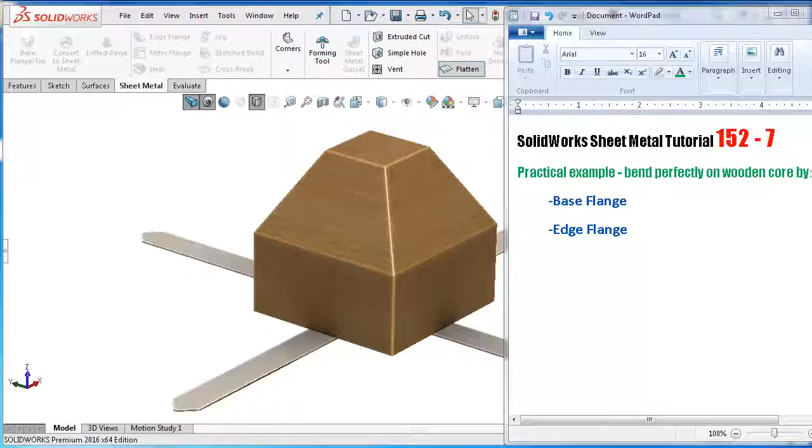This tutorial will be a practical example which we learned before together. We will review the base flange and the edge flange. We will bend this sheet steel perfectly on this wooden core.

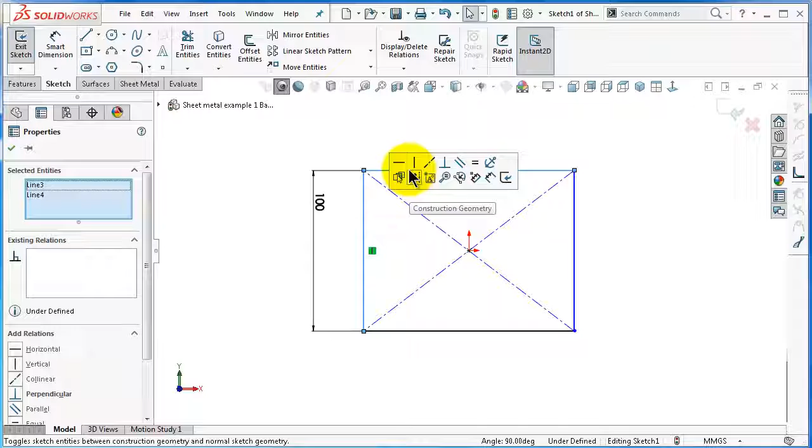Start a new part file, and then start a sketch on the front plane. Let's start making the wooden cube. Select center point rectangle, give it some dimension. Extrude it to 50 millimeter.

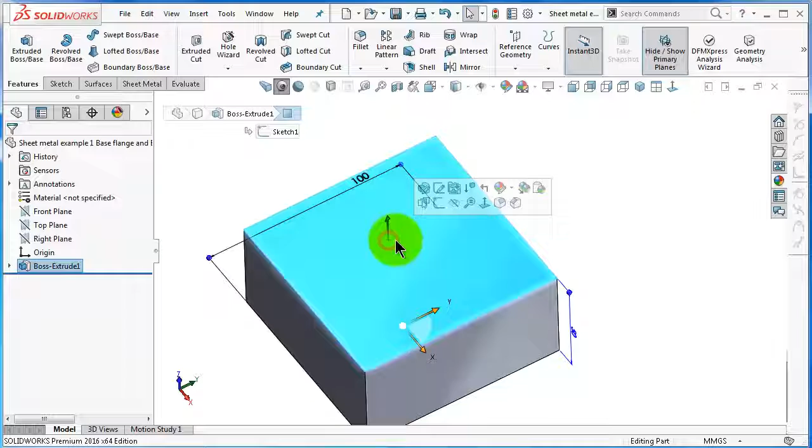And then extrude the surface, the top surface, another 50 millimeter. Select, start sketch, convert entity, extrude 50 with an angle of 30 degrees. Click OK.

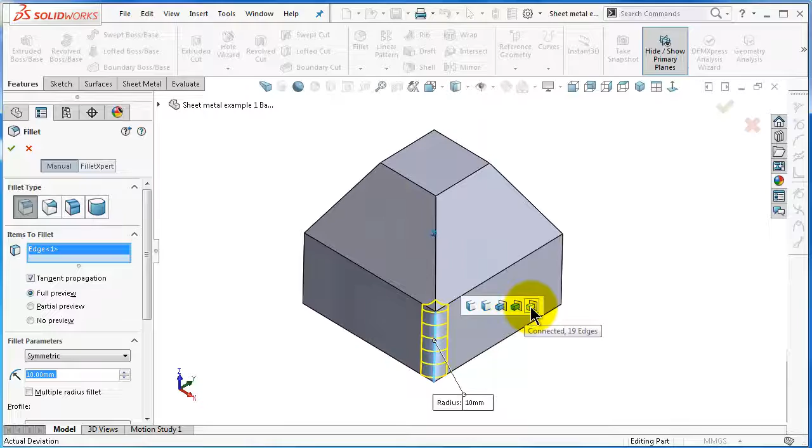Let's add some fillet. Select one edge and then select the whole edges over here with a radius of 10 millimeter. So this is the wooden core. I'll just change the appearance.

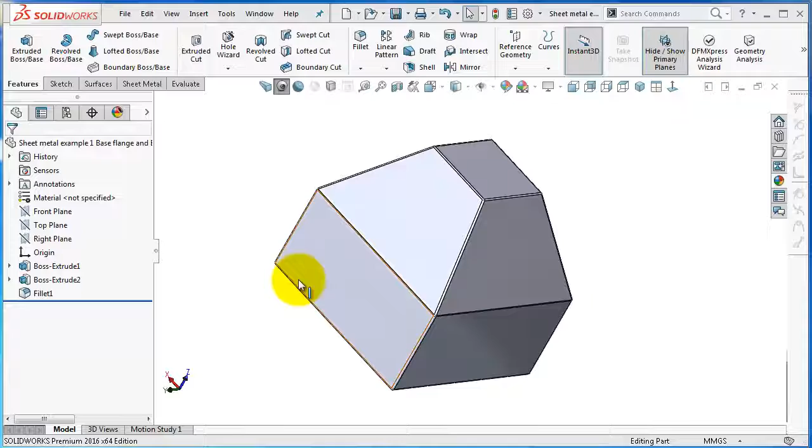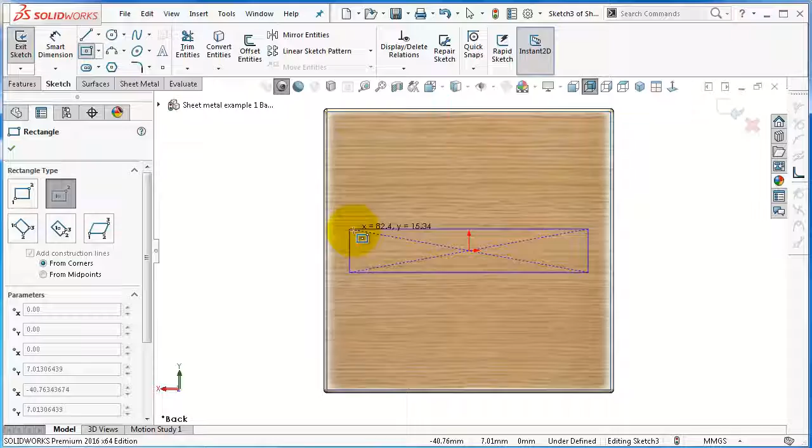Now let's make a base flange on the bottom of this block. Click sketch, normal to, center rectangle. Make sure to pick the inside edge. Make it for construction. Okay, make another one.

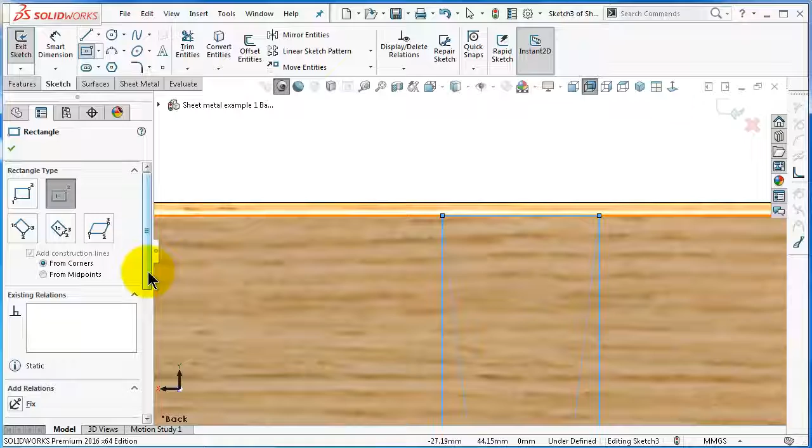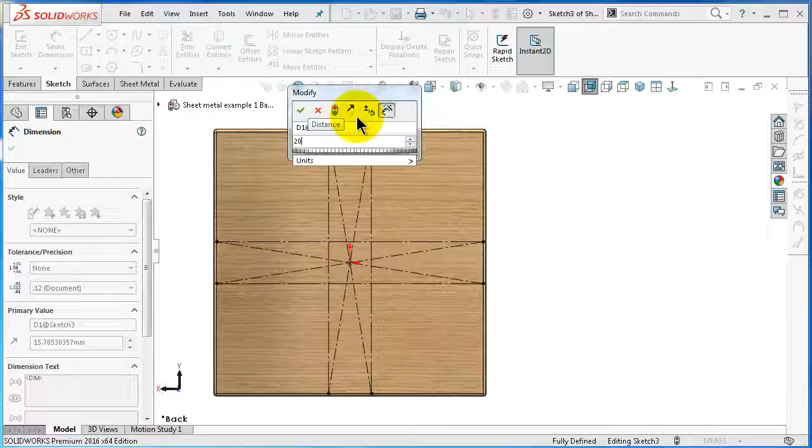Vertically, inside edge for construction. Add equal relation to the edges. Assign some dimension. Give this one 20, and then you will have the construction fully defined. Pick line and select the corners of these rectangles.

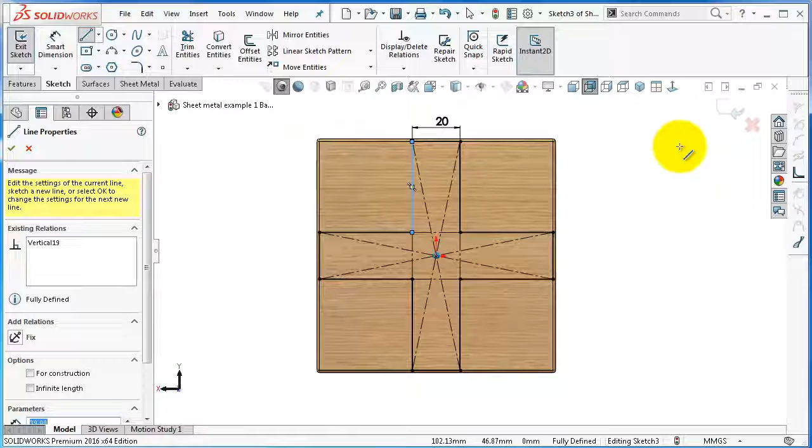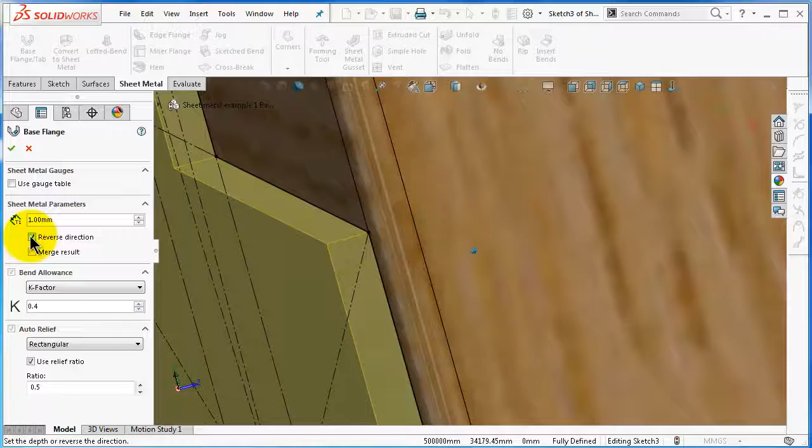This is the shape of the base sheet or base flange. Go to the sheet metal, base flange, and you'll have the sheet. Make the thickness to be 1 millimeter, reverse direction, and without checking the merge result, because this will be a sheet, the K factor will be 0.4.

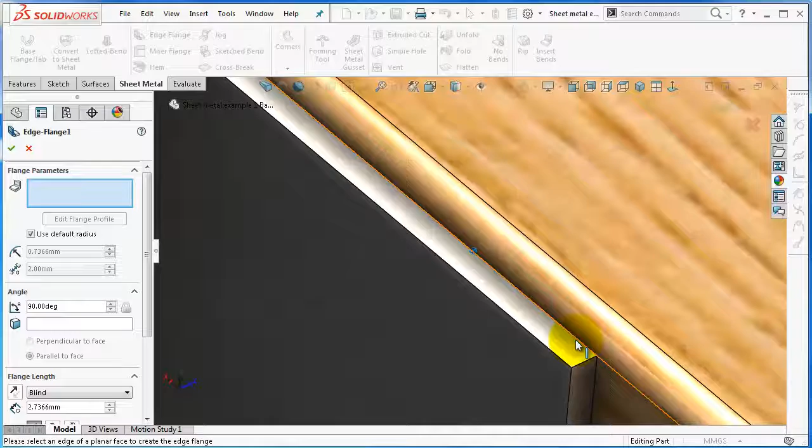And now let's see how to make edge flange that are perfectly bended on this wooden core. Go to the edge flange, select the edge, this edge, select second side, third side, and fourth side.

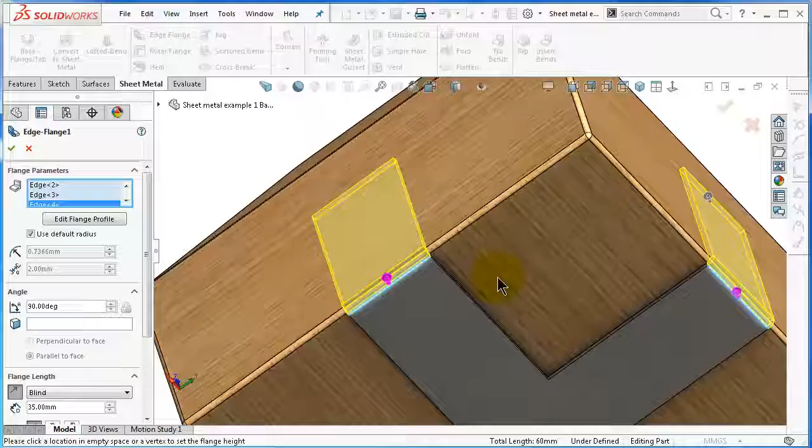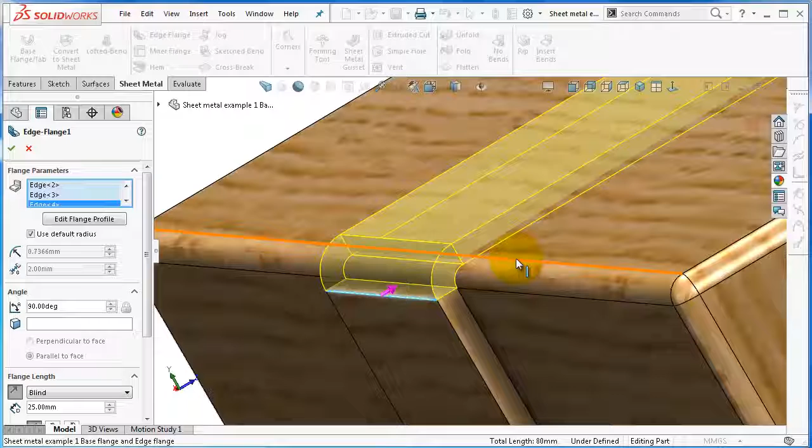Now let's go have a closer look at the edge. Now you will see the bended steel is overlapping over the core. This overlap happens when you are bending this sheet of steel without any help or anything. But we're going to override this value because we have this wooden core as a helping core for bending.

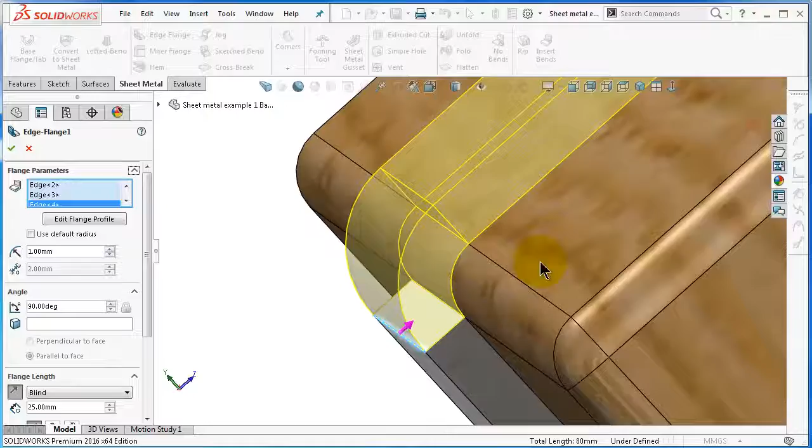The bend radius to 1 millimeter. And you see the bend radius is on the wooden core. And you can check as well on the other side. You will notice all this side are perfectly matching.

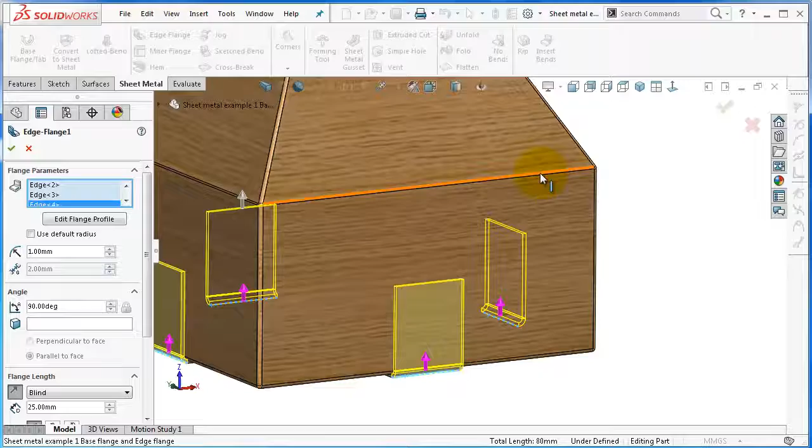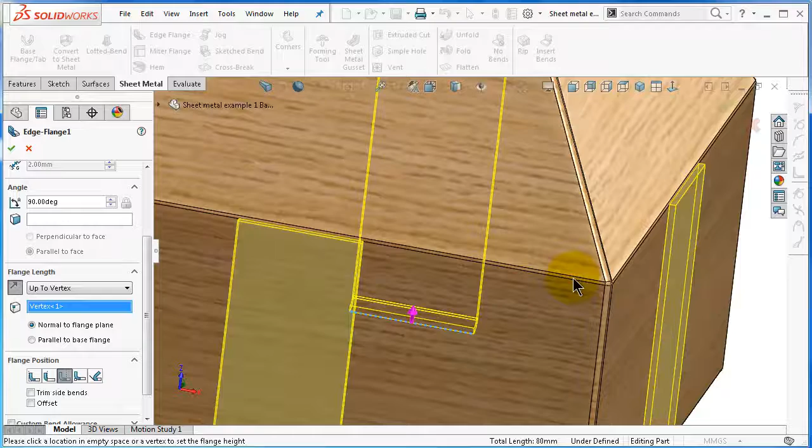So now how to extend this edge to this edge over here. As we learn, go to the flange length and select up to vertex and select this point. You will notice that the edge flange is perfectly matching that edge. When you are done, click OK.

And one thing before closing, you might have this selected and this is overlapping. You can pick the bend outside, click OK.

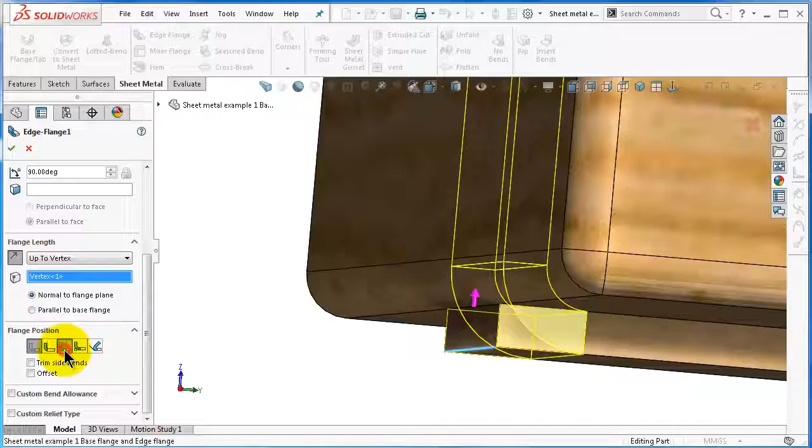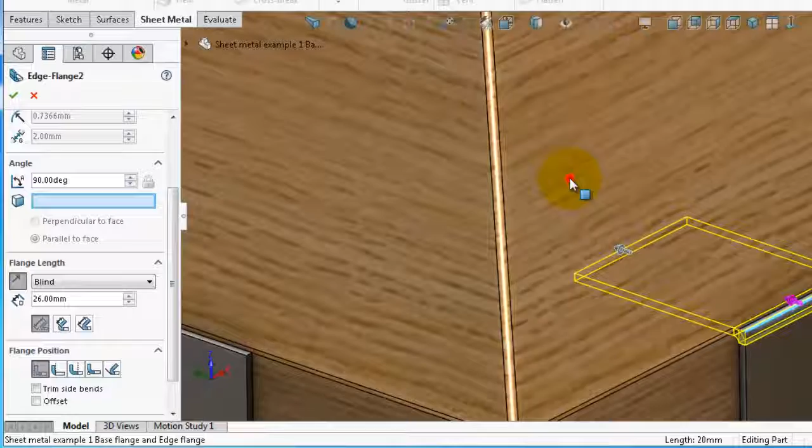Go to edge flange, select the edge, then you will have an option for the edge flange angle. Select face, go to the face and select the face. And then to make the exact length, go to the bend up to vertex and select this point.

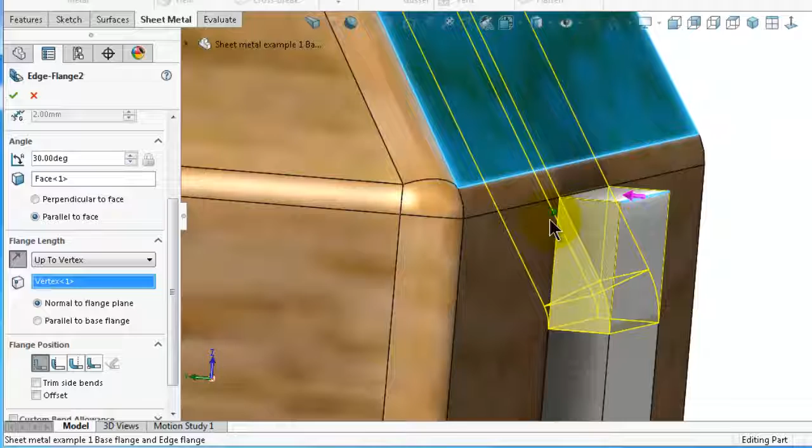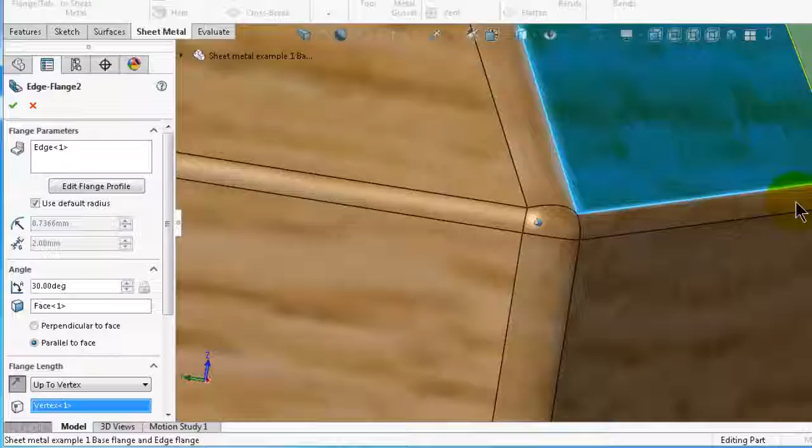Let's check that bending is correct. So you will notice here the bending is wrong. So you go again here to the flange position, select bend outside, and you will see again that the bending is not perfectly matching the edge. You can override the bend radius to be 1 millimeter, and you'll have the bend matching the edge.

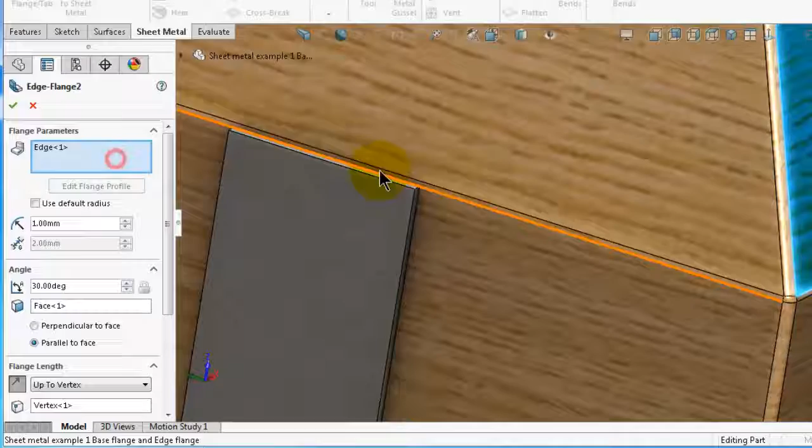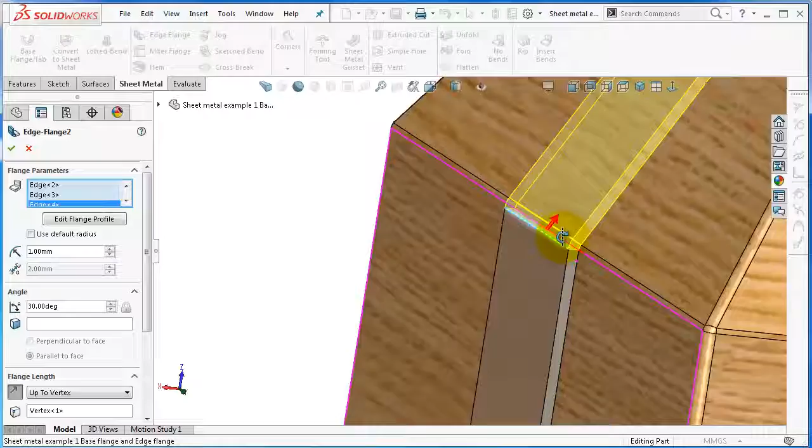When you are done, you can select the rest of the edges. And when you are done, click OK.

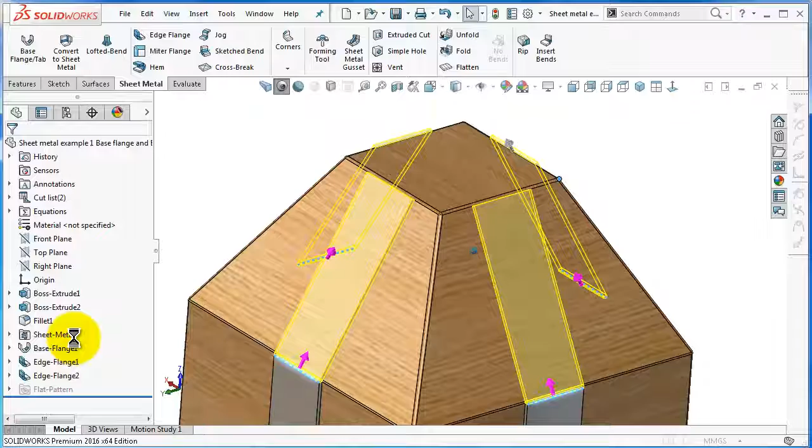You might get this not correctly showing. You can just edit the feature and check that it's up to vertex and go again, and it will be corrected.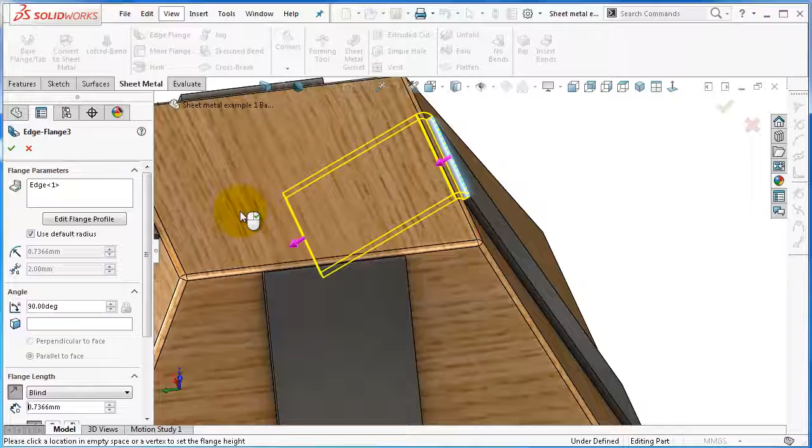And now time for the last bending, and this one will be easier. Go to the edge flange, select the edge, extrude or pick flange length, make it 10 millimeter, and check it is correctly bended.

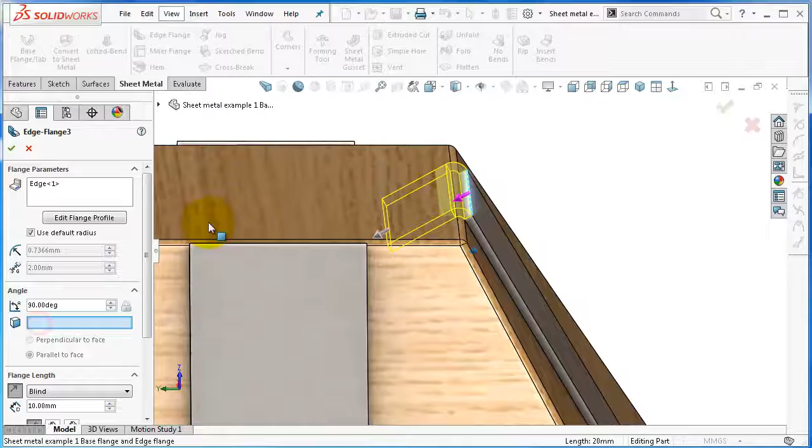If not, you adjust the angle over here. Select face and select this face, and for the radius override 1 millimeter. When you are done, select the rest of the edges.

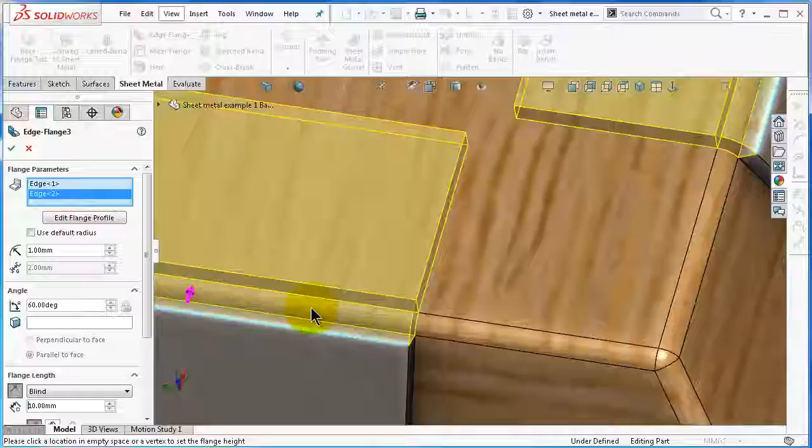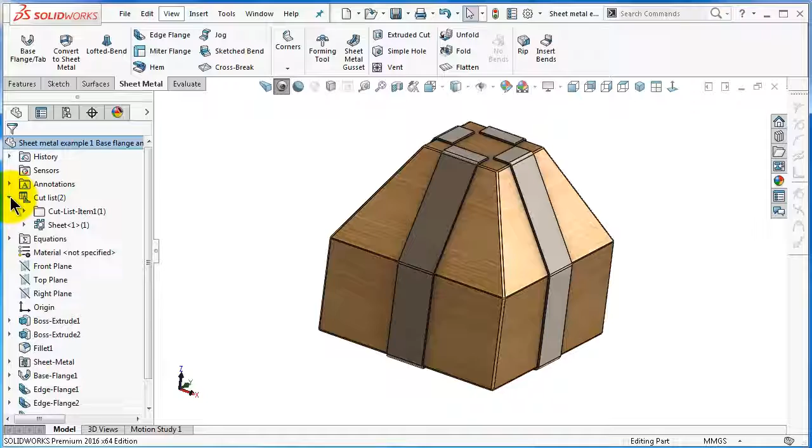Okay. So now we have this piece of sheet metal perfectly bended on that wooden core. And these are two separated bodies. You can notice them over here, over the cut list. So now let's try to flatten that.

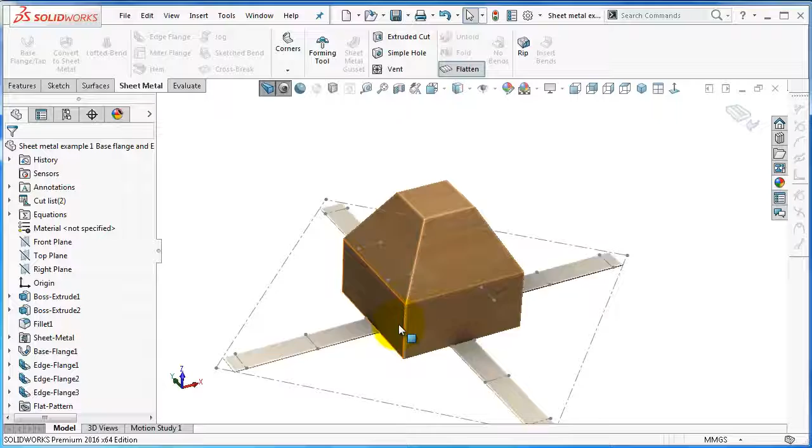And here you have, go to the first extrude, show, and you will see the wooden core inside. And unflatten or bend it again.

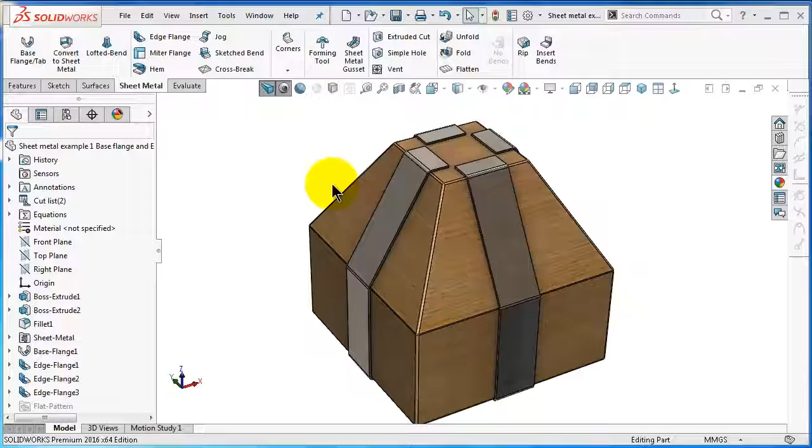And one last thing I would like to show. Let's edit the last bended edge over here with the edge flange. Edit flange length to 20 millimeter.

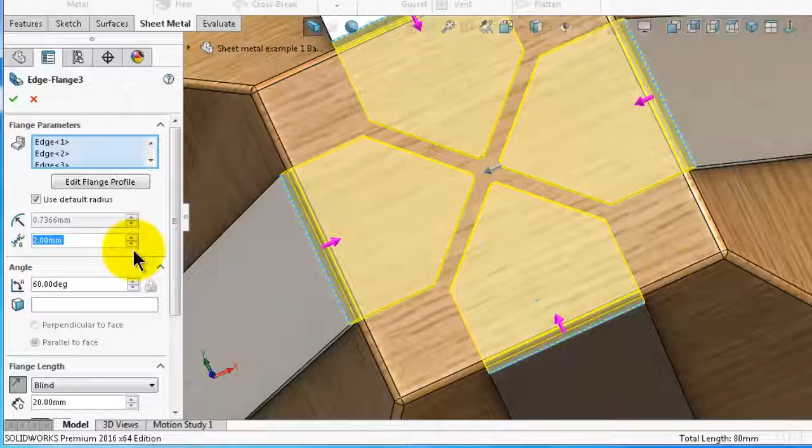You will notice the edges got trimmed automatically, and we can edit the gap as we learn. We can make it 2 millimeter or 0. I will keep it 1 millimeter. Okay.